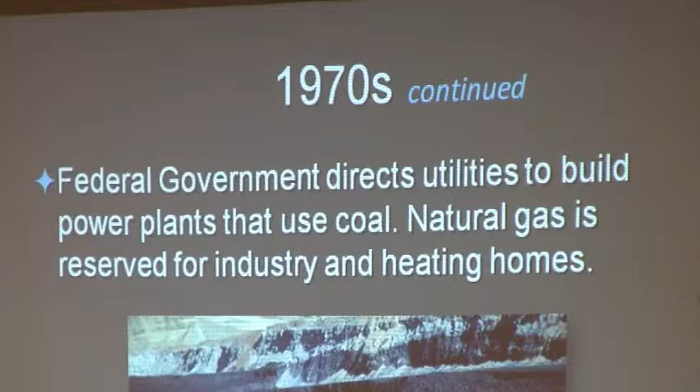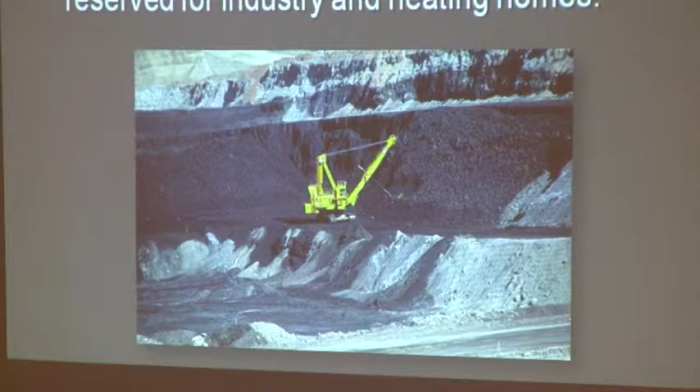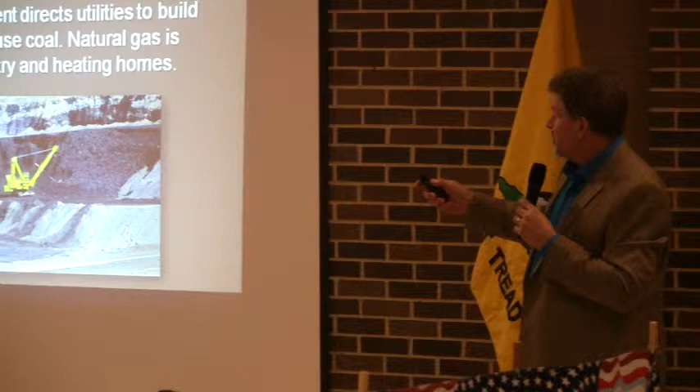Not exactly the same policy we're getting from the federal government today, but I want to point this out because a lot of people don't remember that. The federal government directed us, they actually for a few years prevented us from using natural gas for generating electricity. That's why you see, especially in the Midwest, a lot of coal-fired power plants. We didn't have access to the hydro that you have in coastal regions like Washington and Oregon, we didn't have as many nuclear plants built, and we had access to a lot of coal in our region. So we responded to the signals that was given to us.

Coal was affordable and it was a domestic resource. We didn't have to worry about foreign politics interrupting our flow. The other nice thing about coal was we found we could warehouse it on site, have for example 6 months supply if we needed to. One thing we found out during January is there was a supply disruption in the natural gas line that caused some problems. There is no storage capability with natural gas, that's one of the challenges. The nice thing about natural gas is it has less emissions than coal, so there's always trade-offs between fuel choices.

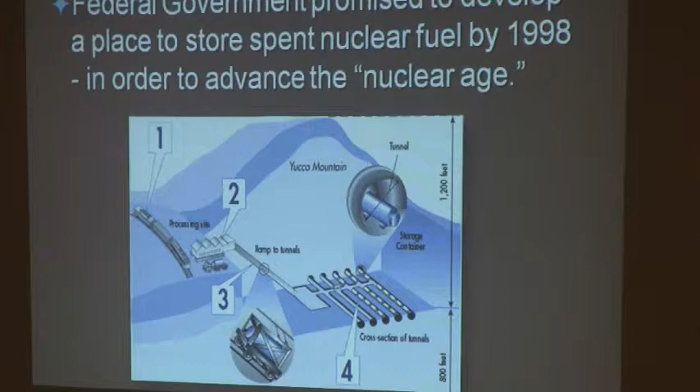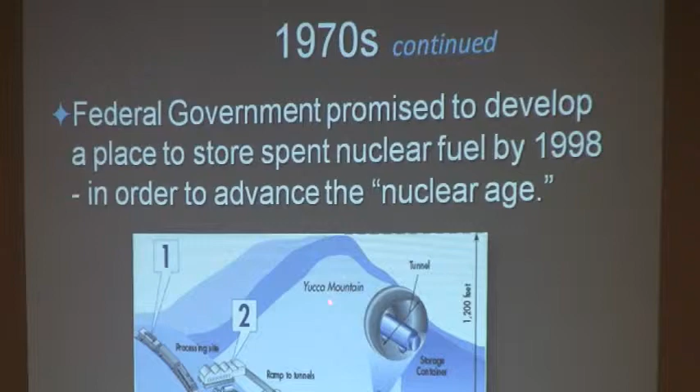In the 70s we also had the federal government advocating the development of nuclear energy. They said we need to develop a federal location, a warehouse, for spent fuel from nuclear power plants, and Yucca Mountain was chosen. It was going to receive fuel in 1998. I think the last suggestion was we may have a repository by 2050.

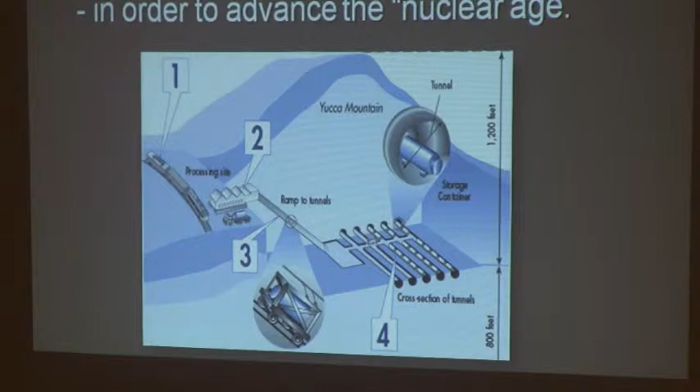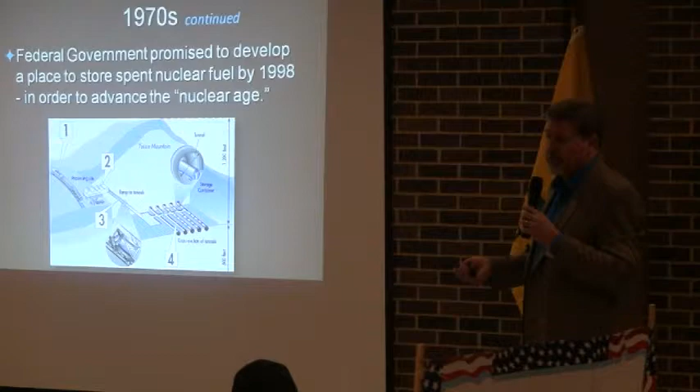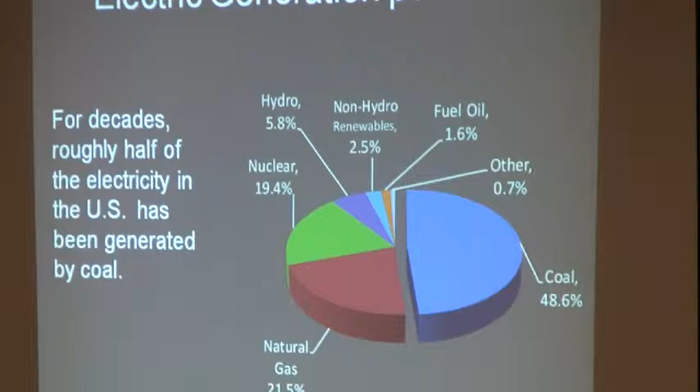They have not been able to get a national repository. They have done a lot of work at Yucca Mountain, but frankly it got very political, and in spite of the billions they spent developing it, it has now been effectively shut down. I don't know if they'll ever be able to restart it or not. As a result, the utilities end up having to warehouse the spent fuel until the federal government is able to fulfill its obligation.

Now, because of those policies—use coal, use nuclear—it wasn't long and we said go ahead and use natural gas if you want. We ended up with a portfolio like this, where roughly half of the electricity in the country for decades was made from coal, natural gas about 20%, nuclear about 20%. That was sort of traditional for a number of decades.

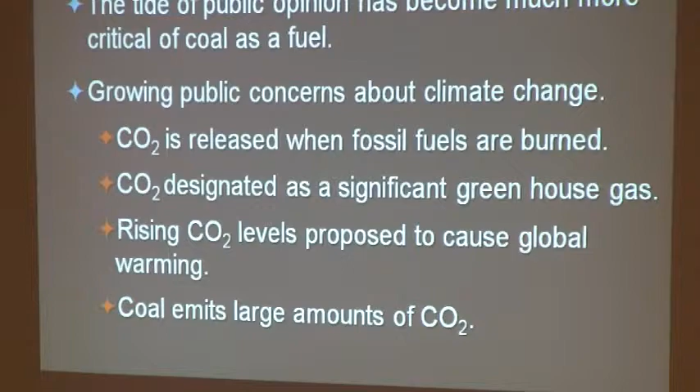But in recent years, the first presentation was a perfect setup for this, because there's been a lot of talk about global warming and the role carbon dioxide is having on that. Because of that, the tide of public opinion has turned very negative towards coal, because coal has large amounts of CO2 emissions. For each megawatt generated, coal will release about twice as much CO2 as natural gas. So if as a policymaker you believe CO2 emissions is a risk to our future, you're going to say choose a fuel resource that produces less CO2. And so that's what we're seeing in the body politic—we're seeing all of energy policy being driven by the concerns about CO2.

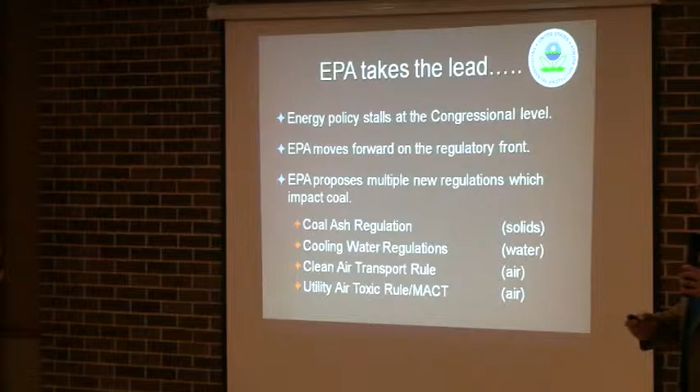I hate to break this to you, but Congress hasn't been working very well together lately. As a result, energy policy is stalled at the congressional level, especially when you have Republicans controlling one body, the Democrats the other. There is no way they're going to find common ground.

And so in the absence of their action, you've got the Environmental Protection Agency moving forward on the regulatory front. So it becomes a choice of, would you prefer to have Congress working on energy policy, the elected officials, or an agency that maybe has less ability to engage? EPA has proposed regulations in the last 5 to 10 years that basically impact every facet of coal generation.

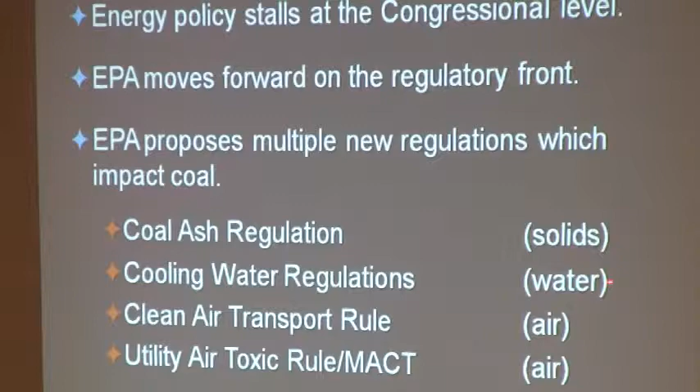Solids, water emissions, air emissions - a number of fronts. I'll use Dairyland as an example again. On our two older plants, built in the late 70s, early 80s, we just invested $324 million in air emission equipment.

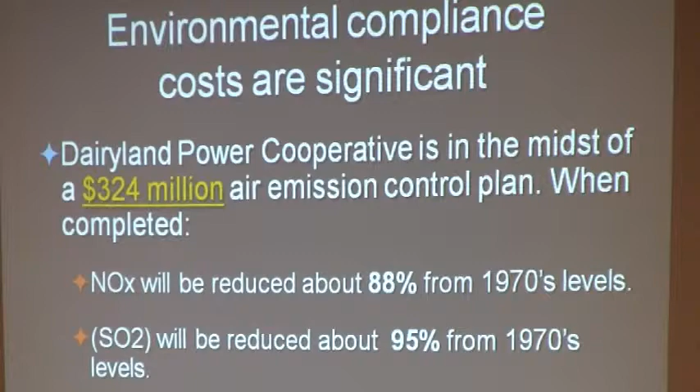As an analogy, think of the plant as a car and the air emissions equipment as the muffler. We just spent a whole lot more on our muffler than we did on the car. We are spending more on emission equipment than we did on the original plant.

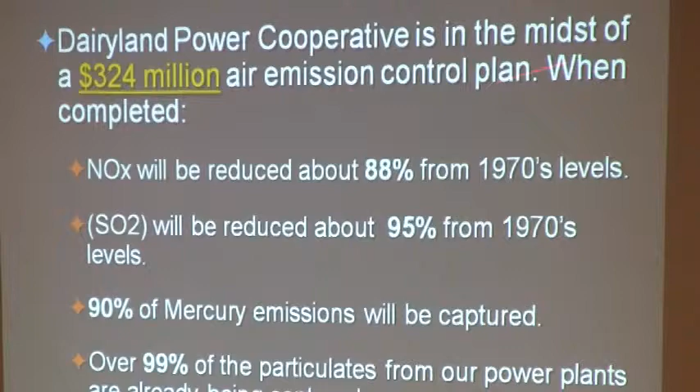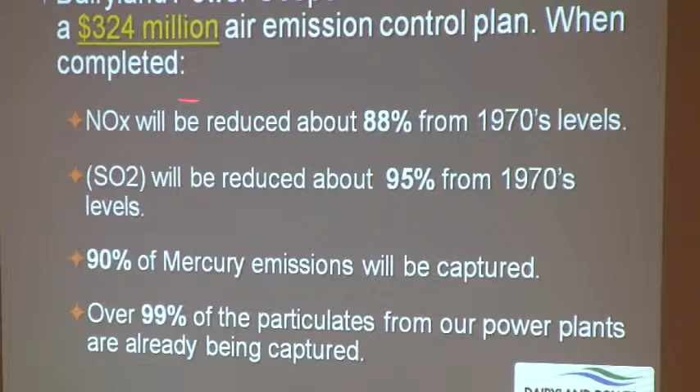But by doing that, we've reduced the emissions of nitrogen oxides by 88%, sulfur dioxide by 95%. We'll capture 90% of the mercury emissions. Last I heard, we're capturing something like 99.8% of the particulates.

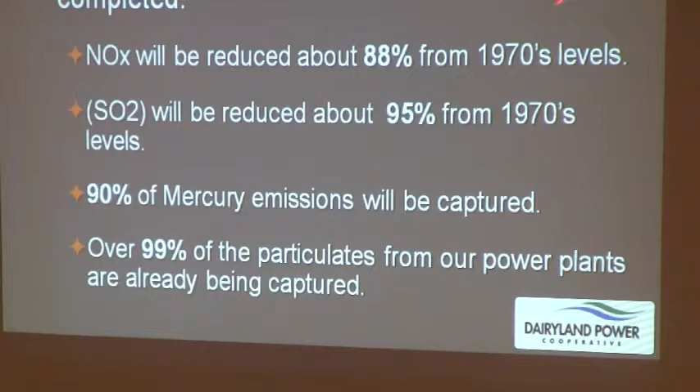In other words, these coal plants built in the 70s have never operated cleaner. It also means that these coal plants, that maybe otherwise would be depreciated out, now have a $324 million debt against them that our members will pay for over time. So the challenge is getting at this.

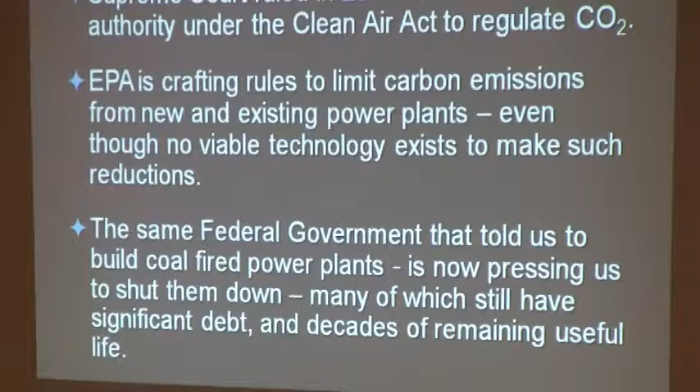In 2007, the Supreme Court ruled that EPA does indeed have the authority under the Clean Air Act to regulate CO2. So EPA has moved forward in crafting regulations to do just that. As a matter of fact, they just released, not too many months ago, rules on new coal-fired power plants. The rules essentially say the only way you can build a new coal-fired power plant is if it can capture the carbon dioxide. The technology technically exists.

It's not really viable on a large scale, and if you can make it work, at least the current technology is too expensive. The Congressional Budget Office even acknowledged that adding CCS to a power plant probably increases its cost of operation by 60 to 70%. It probably doubles the cost of the plant, and it takes about a third of the energy of the plant to run the carbon capture.

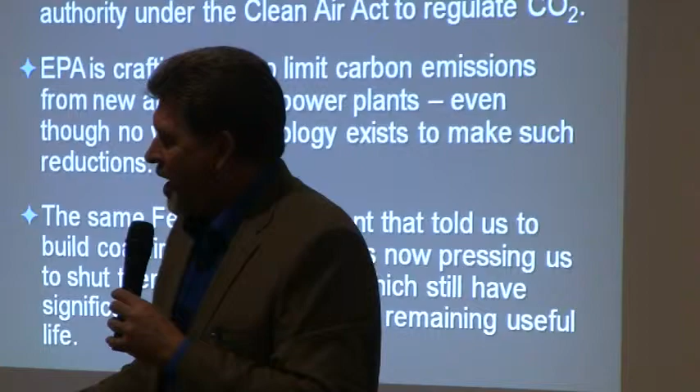That's one challenge. The other challenge is even if you can capture that carbon and inject it into the correct geology underground, you're talking about millions of tons of high pressure CO2. I don't think that will stand up environmentally, because people will say, prove beyond a shadow of a doubt there'll be no negative impact of injecting that much CO2 underground. I don't think you can demonstrate that.

So I just don't believe that carbon capture and sequestration is going to become a viable technology. What that means is, politically, you can't build a new power plant now. We can plan around that. Our bigger concern as an industry is

what will be the rules on existing plants? Because you remember that slide - historically, how much of our electricity has been coming from coal? Almost half. Now that has trended down in the last 5 years. I think we're down to about a third, or maybe slightly over.

So there has been some conversion, but still, we're at 35 to 40% of our energy coming from coal. And so if the new rules make it difficult or impossible to operate existing plants, it's going to create a real transition challenge for us, because it's hard to replace a third to 40% of the electric supply in a short period of time. So what this means is that the same federal government that in the 70s told us, build coal, is now pressuring us to shut them down.

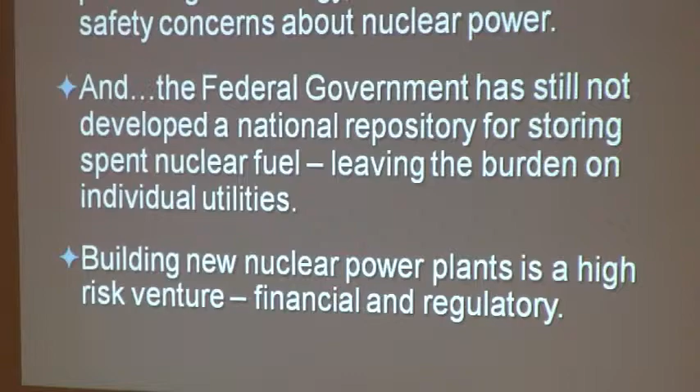There was a lot of interest in new small modular facilities that literally could be built at a central location, brought out on flatbed trucks - kind of technology maybe similar to what nuclear submarines have used. Smaller facilities, you could set them side by side if you wanted to get a large amount of electricity. If there were 50 megawatts each, you could put 5 of them side by side and have a 250 megawatt generation station.

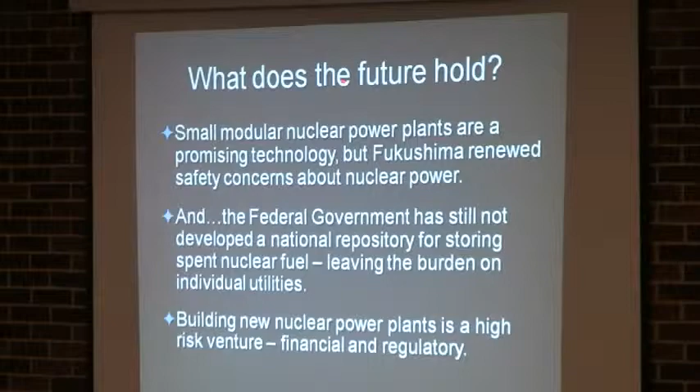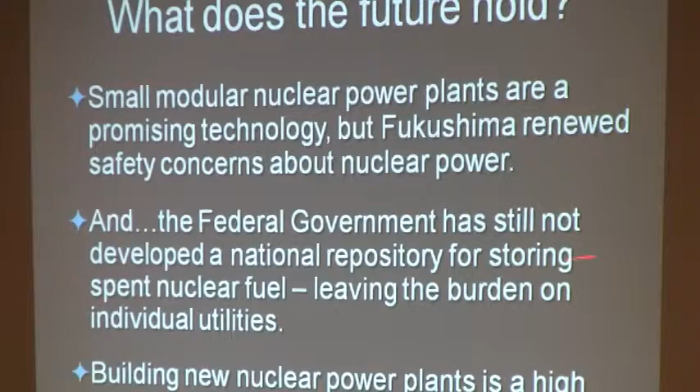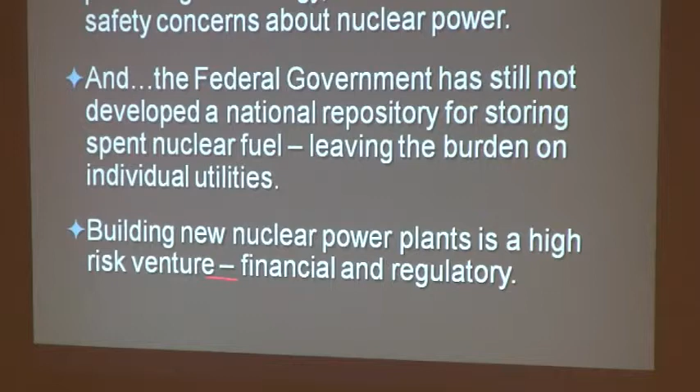But then Fukushima happened, and frankly it created a tremendous amount of concern again about the safety issues surrounding nuclear. So I just don't think nuclear is going to take off in the near future. There's some possibilities in the future, but what would really help it is if the federal government could develop some kind of energy policy to take that spent fuel or reprocess it and reuse it again in facilities. Right now, building a new nuclear plant is a high-risk venture, both financial and from a regulatory standpoint.

I'll be first to admit, new technology is challenging that model of large central station power plants supplying all the need. So the question is, can wind and solar replace those traditional fossil fuels and nuclear? Wind turbines, we've all seen them dotting our landscape. You see small backyard units. I think at one time my grandpa even had a small wind charger for that radio - a little bitty wind charger that stood outside in front of the house, big enough to recharge that battery. Obviously all the way to huge units like we have now.

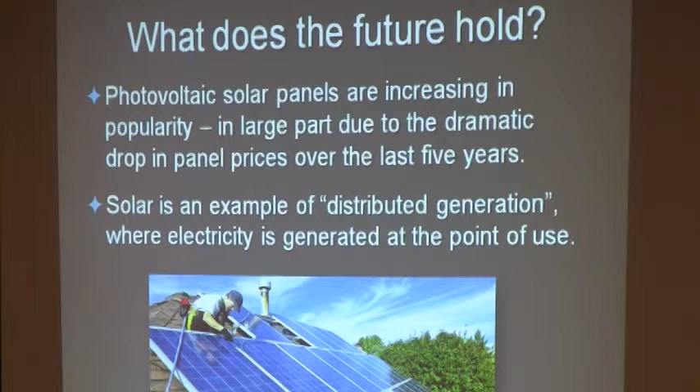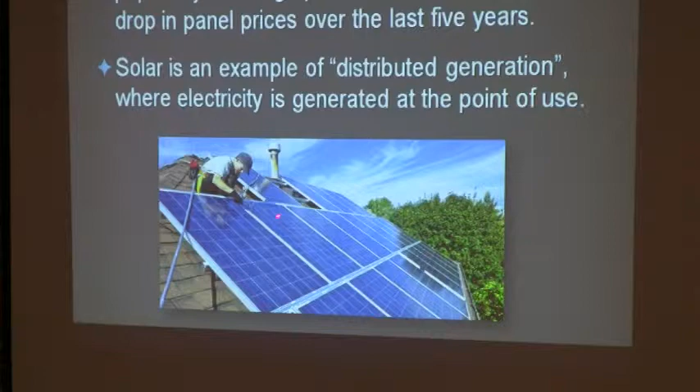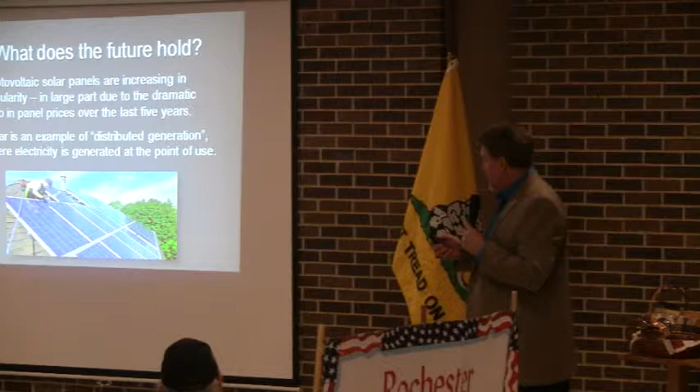We're seeing a lot of interest in solar panels, in large part because the price of panels has dropped about 70% in the last 3 to 4 years. Tremendous drop in price, and because of that there's been more interest. Solar is an example of distributed generation, where electricity is going to be generated at the point of use. What we see a lot of solar going in is individuals that want to put some on their own roof or in the backyard and offset some of their own energy usage. A lot of times they don't produce enough to meet all of their need, but we do have installations where they literally produce excess over their use and then sell some of that back to the utility.

Now, I talked about solar quite a bit. Solar is described as a disruptive technology, and it has the potential to displace the traditional utility structure. Indeed, some people envision a future in which every home, every business will have their own solar panels, maybe a wind turbine. They'll generate enough electricity for their own needs. And that vision is that you won't have a need for a large power plant.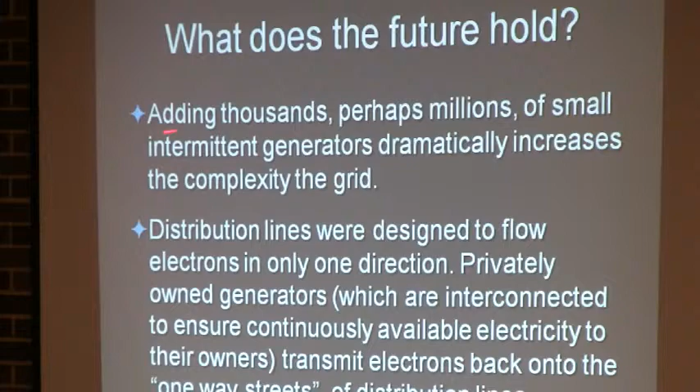Now I'm going to try and wrap this up, because we're getting to the crux now of the energy policy challenges. We've got a variety of technologies, and what appears to be the direction we're going is adding thousands, maybe millions, of small intermittent generators—solar panels, wind turbines, maybe new technologies coming.

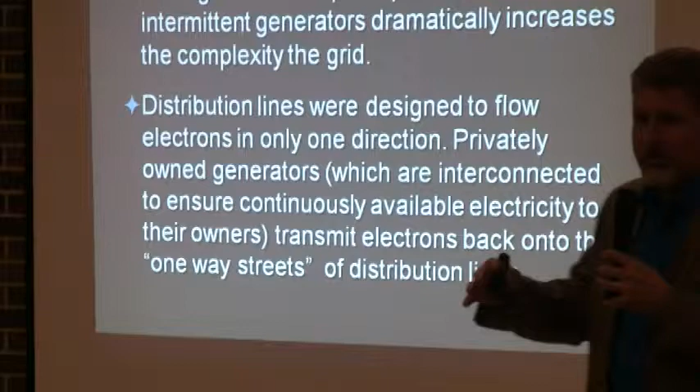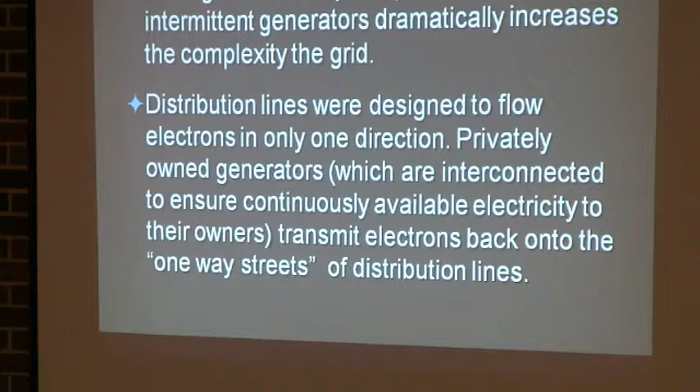Okay, adding thousands of nodes of generation input into the grid. Part of the utilities' role is to make sure that generation and load are balanced at all times of the day. The more generation inputs you have, the greater the complexity of balancing the two. Also, distribution lines were designed to flow electrons in one direction, from the generator to your home.

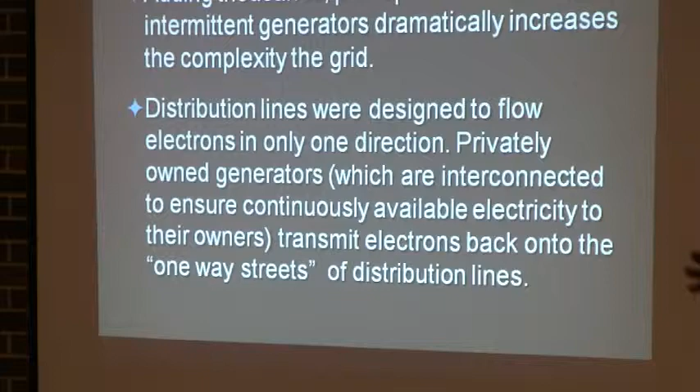You put a solar panel on your roof, and there'll be times when your solar panel may be making more energy than you use, so it's going to inject some of those electrons back toward the utility. It's like putting a car into a one-way street. It can create conflict until you get the rules worked out—maybe turn that into a two-way street now. Those distribution lines were originally designed as one-way streets.

So these are all, what should I say, engineering challenges that we have to accommodate. The utility role is going to be more challenging.

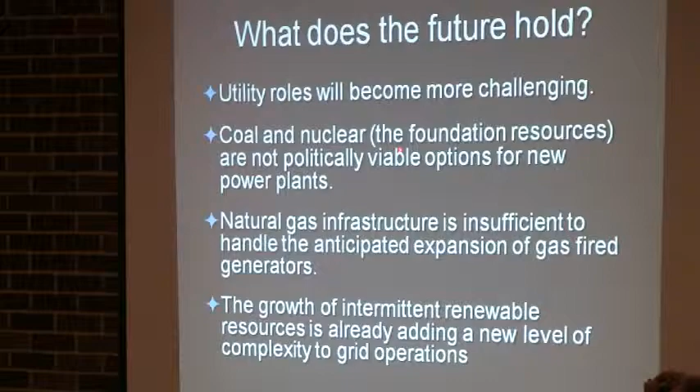The two most foundational resources are becoming politically unpalatable. You can't build new coal. New nuclear is very difficult to build—I think there are 3 in the country being built. I'll be interested to see if they get it done and on budget, because it's very, very difficult.

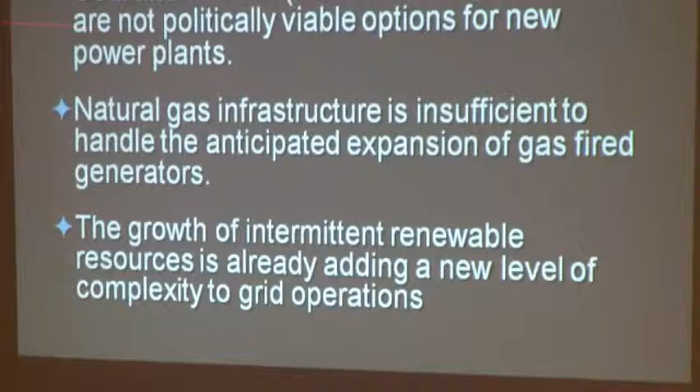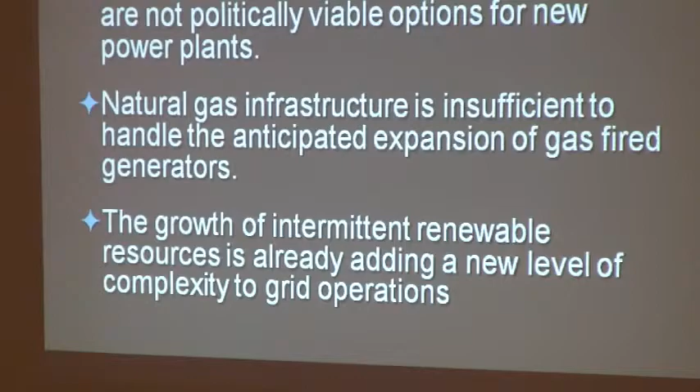Natural gas plants are being planned and built. Here's the challenge: I think they're going to get built faster than we've got infrastructure to serve them. We're going to need to add natural gas pipelines. As I mentioned, in January of this year, we already had natural gas supply disruptions during the cold weather, when demand was exceeding supply.

And of course, intermittent renewables is going to add a new level of complexity. So these are the challenges that utilities are going to wrestle with.

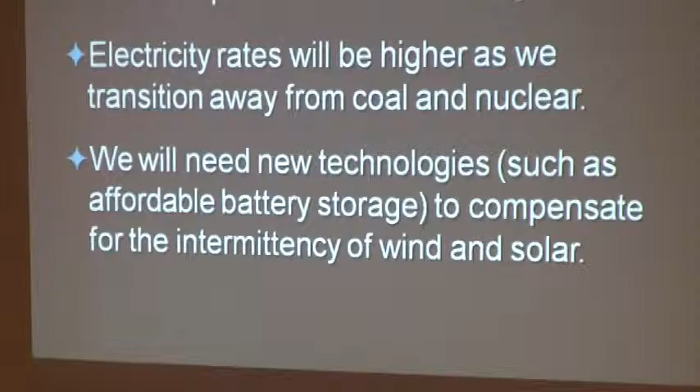Especially if we transition away from baseload plants that run 24 hours a day, we're going to need technologies like affordable battery storage or something, so that you can generate excess energy during the day when the wind is blowing and draw it back when the sun is not shining or the wind has declined. So we're going to need to integrate new technologies.

So here's the conclusion: is America's energy policy becoming visionary, or is it becoming more vulnerable? Here's my answer—it's becoming more challenging. Only time will tell if we'll be able to, from an engineering standpoint, integrate all of these new challenges.

As a utility, you like things the way they are, or the way they have been, because we're comfortable. I have to acknowledge there is a limited amount of fossil fuel in the world that's available. Now we've got a lot available at the moment, but some of this discomfort helping us transition to renewables—maybe there's a role for that. So with that, thank you for your effort.